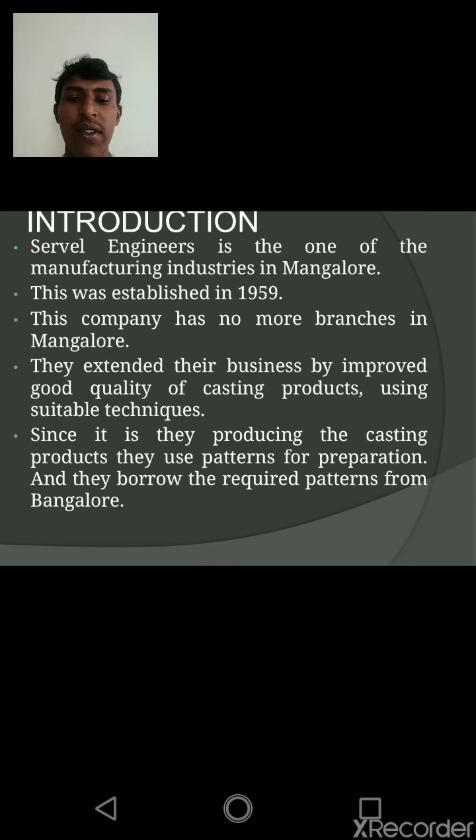Introduction. Servel Engineers is one of the manufacturing industries in Mangalore. This was established in 1959. This company has no more branches in Mangalore. They extended their business by improved quality of casting products using suitable techniques. Since they produce casting products, they borrow the required patterns from Bangalore.

The company has the capability of producing products like rock crusher blades, jaw plates, crusher side plates, coffee nut polisher, gearbox, etc. They require furnaces in order to melt the metal. They use two induction furnaces, one of which can carry 65 kgs of molten metal, whereas the other has a capacity of 100 kgs of molten metal.

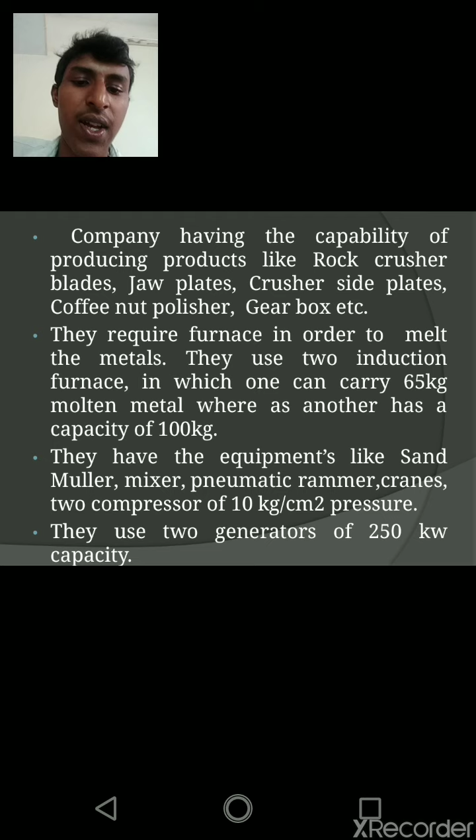They have equipments like sand muller, mixer, pneumatic rammer, cranes, two compressors of 10 kg per centimeter square pressure, and they use two generators of 250 kilowatt capacity.

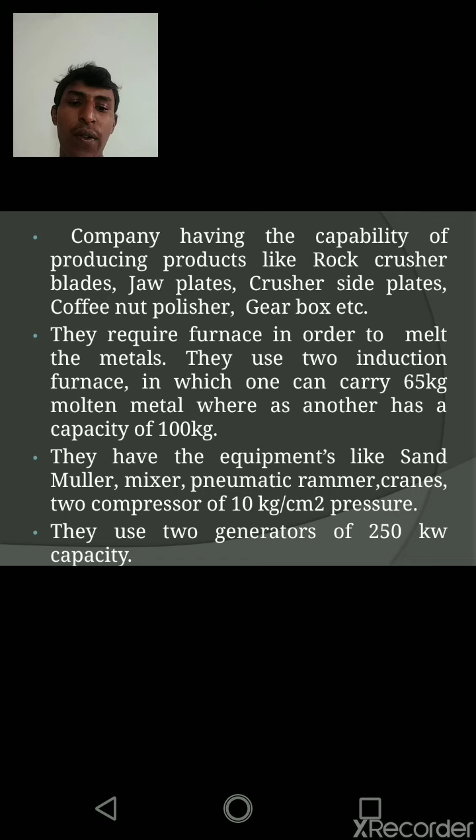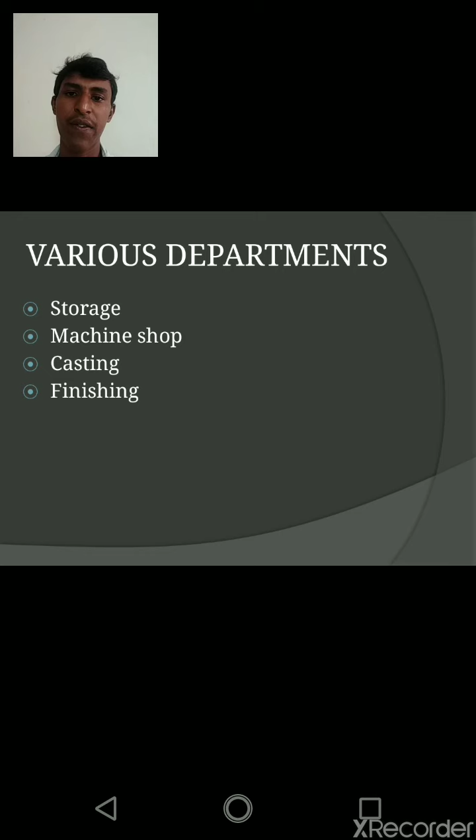Various departments. The various departments are the storage department, the casting department, and the finishing department. Storage department is used to store the raw materials. The machine shop is equipped with machineries like lathes, milling machine, drilling machine. The casting department has molds where the mold is prepared, and the furnace is in the casting department, and the finishing department has grinding equipments and all the finishing equipments required.

The storage department. In the storage department, the material required for the products to be casted is available. Most of the materials are purchased from scraps, and they also purchase ingots to produce the casting. The department also contains the required tools in casting like trowel, gas rod, patterns, chemicals, oxygen cylinders, and CO2 cylinder.

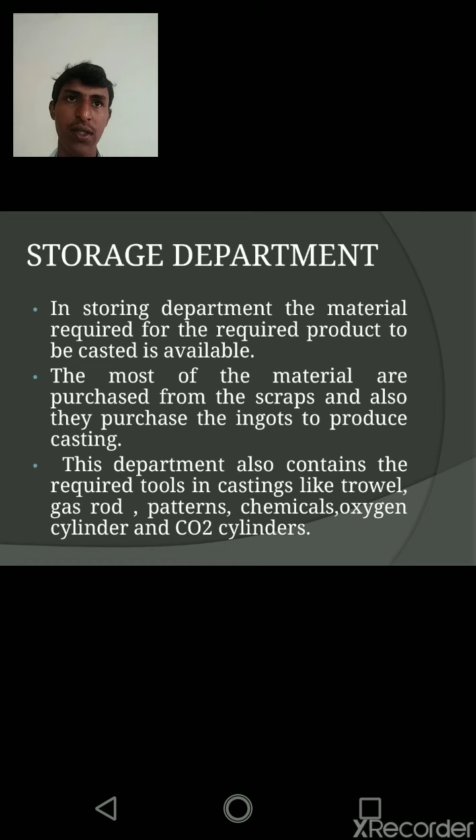Of the chemicals, one is the liquid which they pour during mixing of sand for binding, and the other is spirit. They paint it above the mold, and they burn that spirit so that the top particles of the mold become harder.

Machine shop. A huge range of machines required to finish the cast products is present in the machine shop. It mainly contains CNC lathe, engine lathe, bench lathe, radial drilling machine, horizontal drilling machine, universal milling machine, shaper machine, etc.

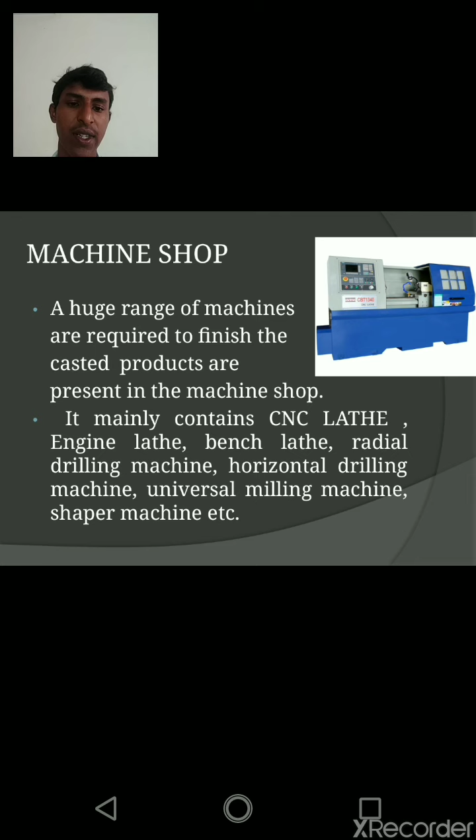Casting department. This department contains control unit of induction furnace, generator, induction furnaces, cranes, cutting machine, pouring buckets, mold box, variety of sands like finishing sand, parting sand, etc. The main process in casting is melting the metal. The company uses two induction furnaces of 65 kg and 105 kg capacity. The furnace works based on the principle of electromagnetic induction.

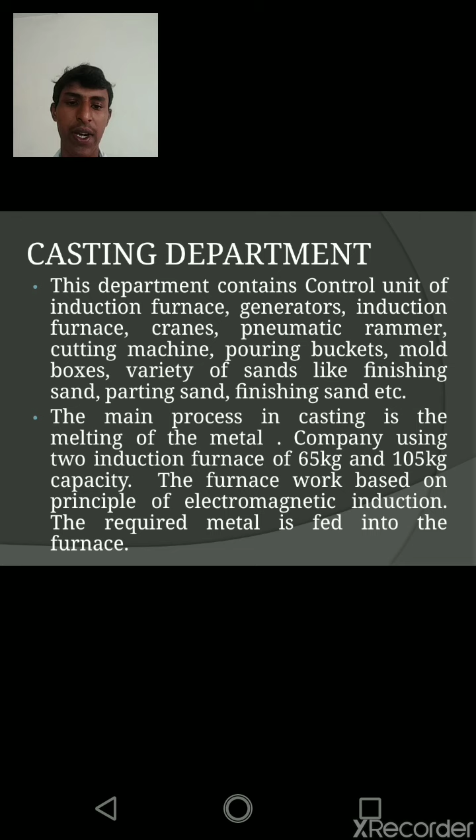The required metal is fed into the furnace. The molds are prepared using the CO2 gas molding technique. In CO2 molding, carbon dioxide at a pressure of 5 kg per centimeter square is introduced into the prepared mold box using packing sand and finishing sand. The mold box is prepared using the packing sand and the finishing sand, which are just poured. The pattern is kept above, and the mold is poured.

And then they make vent holes, which they call gas holes. Using the rod, they introduce CO2 into those holes. As CO2 is introduced, the mold gets harder. No ramming is required in this process. CO2 helps to hold the sand firmly in the mold box.

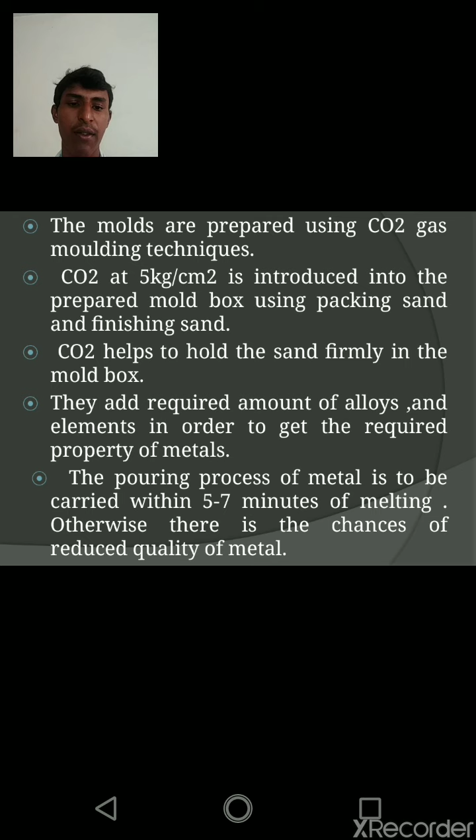They add the required amount of alloys and elements in order to get the required properties of the metal. The pouring of metal is carried out within 5 to 7 minutes of melting. Otherwise, there is a chance of reduction in the quality of metal.

Finishing department. Once the casting is done, it will undergo a heat treatment process. It requires a minimum of 12 hours for cooling. After cooling, like air cooling, the unwanted materials that are formed by the casting process need to be removed. In order to do this, there is the finishing department. They require finishing tools like grinding machines.

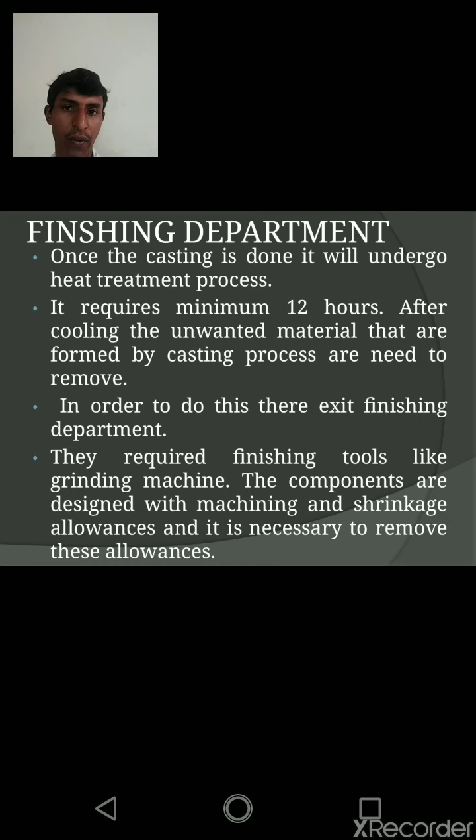The components are designed with machining and shrinkage allowances, and it is necessary to remove these. Finishing involves cutting and removing of sprue and riser, grinding and removing the burrs.

Mold particles are the sand particles stuck in the mold or the prepared part. These sand particles are removed by a technique called sandblasting. In the sandblasting technique, sand at high pressure is sprayed and forced onto the part.

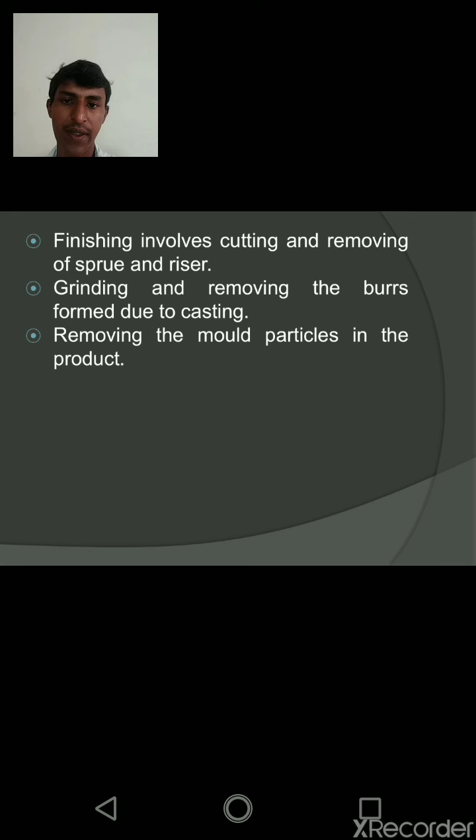Products. Servel Engineer produces various types of casting products like crusher blades, gearbox, boiler fire bars, crusher plates, large and medium side plates for crushers, the coffee crusher, and washers for different machine components.

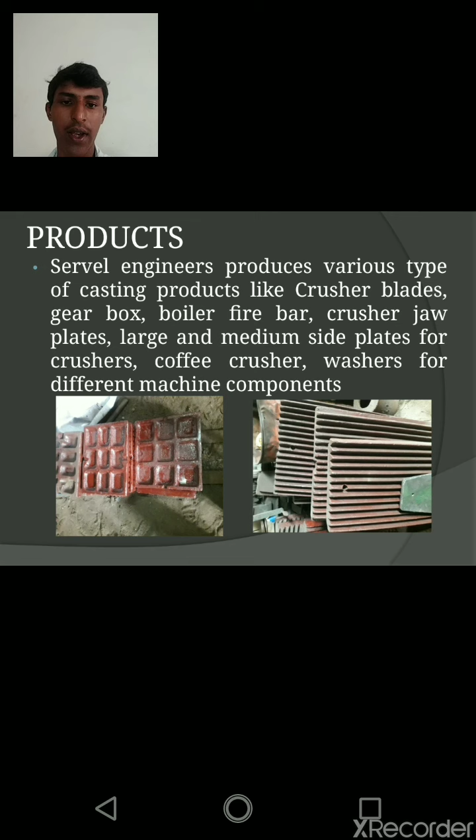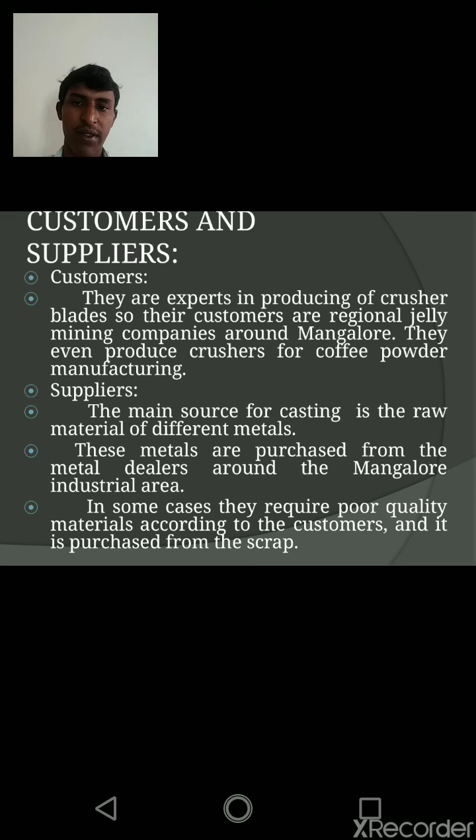The main source for casting is raw material of different metals. The metals come from metal dealers around the Mangalore industrial area. In some cases, they require poor quality material according to the customer, and then sometimes they purchase material from scrap.

Safety equipment. Safety shoes, steel toe boots, are shoes that protect your feet. They help to prevent injuries, or the severity of injuries that may occur in the workplace.

Safety goggles. When operating machinery, goggles are worn to protect the eyes from flying metal pieces, sparks, and powder. They are mainly used while grinding and also while melting. Also, glasses are used.

Hand gloves. Hand gloves are used to protect workers who use harsh chemicals. Gloves should be worn to protect the skin and nails. Thick gloves also protect from rust or cuts from the tools.

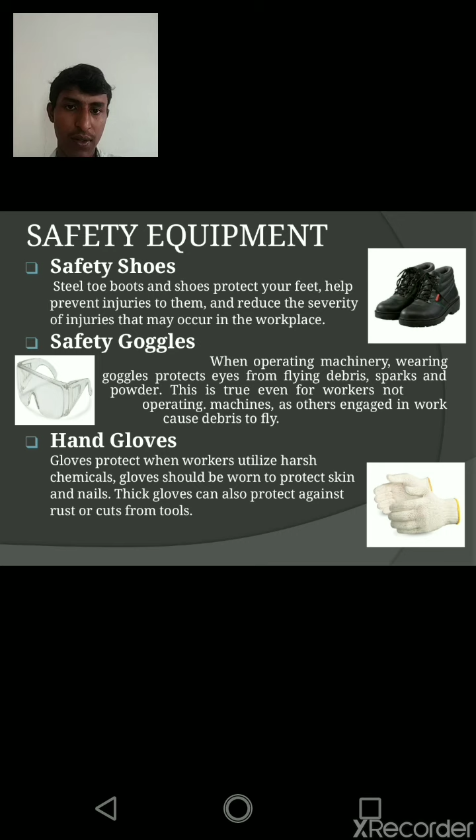Related theory subjects: elements of mechanical engineering, material science, metal casting and welding, tool operation. Outcomes of the internship. During my internship, I have learned a lot of new information about manufacturing of different casting materials, and one of the most valuable is the ability to communicate with people in a professional setting.

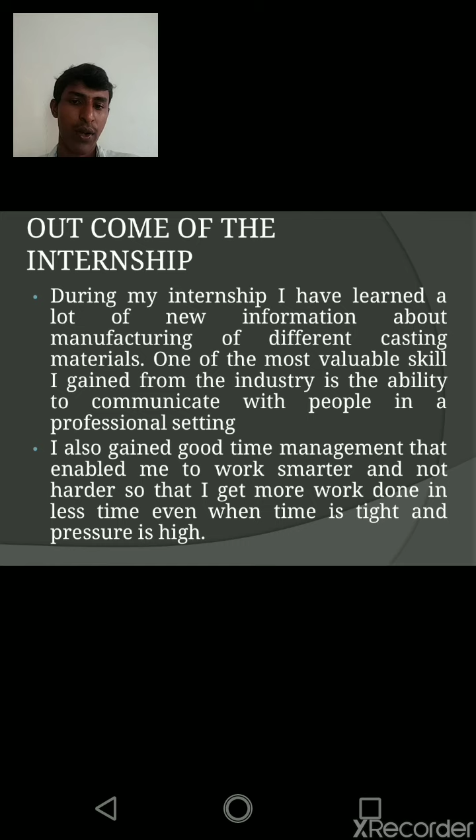I also gained good time management that enabled me to work smarter and not harder, so that I can get more work done in less time, even when the time is tight and the pressure is high. This internship has given me a clear idea of how the industry works and what are the necessary skills required for an engineer in the industry.

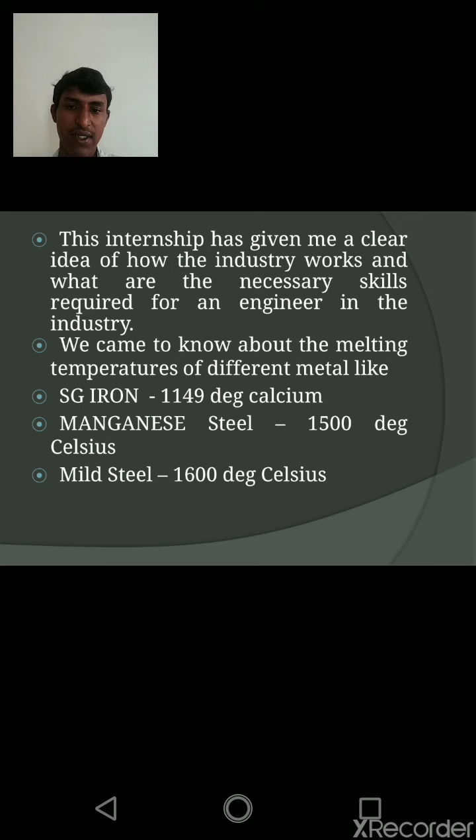We came to know about the melting temperature of different metals like SG iron, that is 1149 degrees Celsius, manganese steel 1500 degrees Celsius, mild steel 1600 degrees Celsius. Also, we had hands-on experience on gas cutting, oxide scaling method, and experience on the grinding machine.

We also got knowledge of properties of metals like SG iron. SG iron is also known as spheroidal graphite iron. According to the name, in the microstructure, if we look into the microstructure of the particle, the graphite will be in the shape of a sphere, and hence it is named spheroidal graphite iron. Also MS, manganese steel, cast iron, bronze, etc.

We also had hands-on experience on preparing molds. We used to prepare molds in the company.